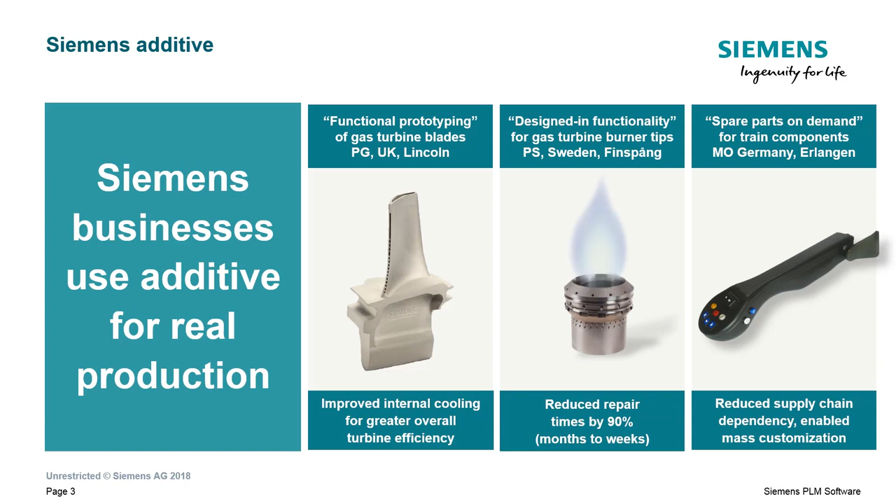So as I said, Siemens, we don't just write software. We actually make these parts, and then we try to take the knowledge from building 3D printed parts and put that back into the process when we design our software.

So as we think about the opportunity with additive manufacturing, we think about that taking several forms. We believe that companies who adopt additive manufacturing have this opportunity to reimagine their products, reinvent their manufacturing, and rethink how they do business.

So on the design side, what we're seeing is a need for companies to reimagine their products for this new additive manufacturing technology. And this means not just modifying an existing design so that it prints properly, but actually rethinking a part, redesigning it from the ground up to take advantage of the capabilities that additive manufacturing brings to the table. With anything less than a full redesign, you can get small gains, but you won't really get the full potential of additive manufacturing.

Then on the production side, we see companies evaluating their processes and looking for ways that additive manufacturing can help augment and streamline those manufacturing processes. So people eliminating moldings and castings and other long lead time types of manufacturing with additive manufacturing. We see them eliminating a bunch of assembly processes by taking complex assemblies and merging them into a single part or fewer parts using additive manufacturing. Things like that are helping people take their manufacturing processes and evolve them to include what additive manufacturing brings to the table.

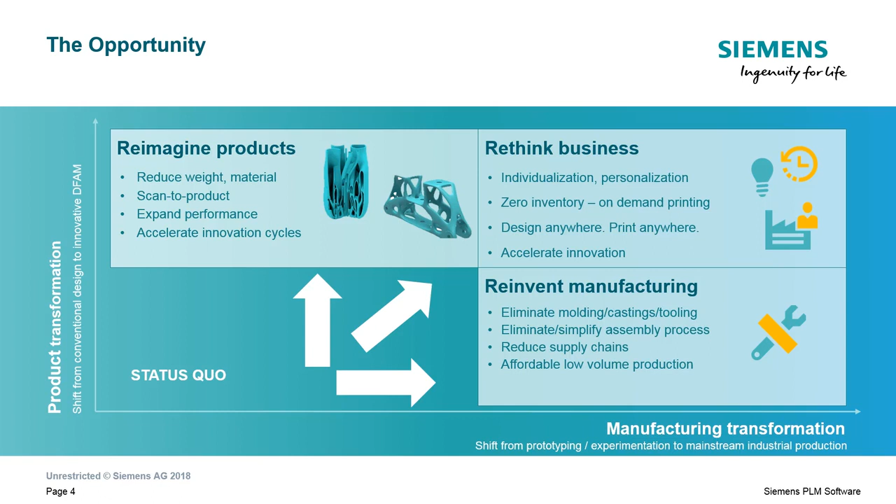Now, that being said, when we look at the additive manufacturing landscape and we talk to various different players in the industry, we also see lots of barriers to industrializing additive manufacturing. And the largest barrier is this disconnected process chain. We commonly talk to customers who have 4 or 5 and sometimes even as many as 8 different software products that they use to complete their additive manufacturing workflow.

Now, each new piece of software they use requires a data translation. It introduces the chance for errors and sometimes even reduces the quality of the data that's being passed between the different stages of these workflows. And furthermore, many industries like defense and medical require traceability of the data from the initial design all the way through to the manufacturing, so if something happens out in the field, they can trace that problem back to wherever it started in the process. But this becomes really difficult when you have such a disjointed process here.

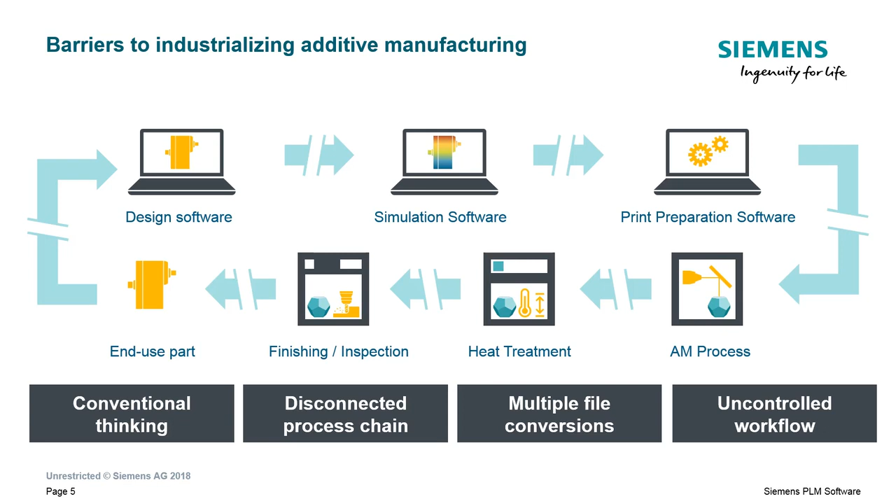So the result of this is that a lot of the companies we talk to feel like they're less efficient than they could be, that the process they have is more prone to error. So at Siemens, we're working towards fully industrialized additive manufacturing, and this means that the entire process chain must be integrated in order to allow for a smooth, lossless exchange of data between the various different processes in the workflow. So data from every step of the process must be handled and managed along with the data from the previous steps.

This tightly integrated process leads to a proper, uninterrupted digital thread from design to manufacturing, bringing about higher quality, more efficiency, and true traceability. We believe that for additive manufacturing to be a truly industrial process, you need a tightly controlled industrial workflow to go along with it.

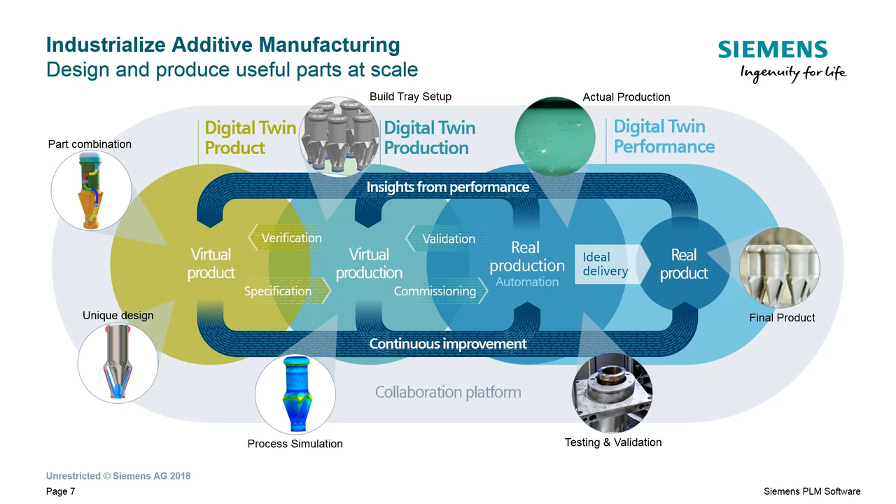We've begun working towards that end by building the necessary pieces of software into our NX suite of products. On the design side, we've introduced Convergent Modeling technology, which allows you to manipulate CAD data with native processes regardless of that data's origin. So facet bodies, scan data, and native CAD data can all interact seamlessly using the same tools you'd use with CAD data alone.

In this series of images, we have a part that came from one of our partners as STL data, so it's just a facet body. But we need to make some changes. We want to remodel this little cone-shaped diffuser at the end on the left, and include some fins to help direct airflow.

To do that, the first thing we have to do is remove the old cone. In a facet modeling system, this requires selecting a bunch of facets, possibly even individually depending on how close they are to other things, deleting them, and then healing the geometry. With NX, we don't need to go through those steps.

We simply create a cylinder using our normal CAD operations, and then subtract that geometry from the facet body, so it just chunks it out, and the system handles all of the intersections and healing of the facet body automatically. Then we design a new cone with the desired fins using normal CAD modeling techniques.

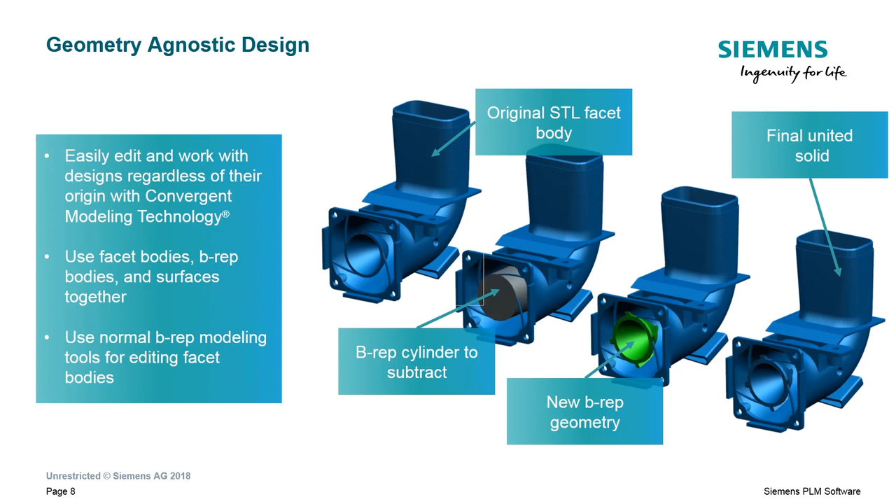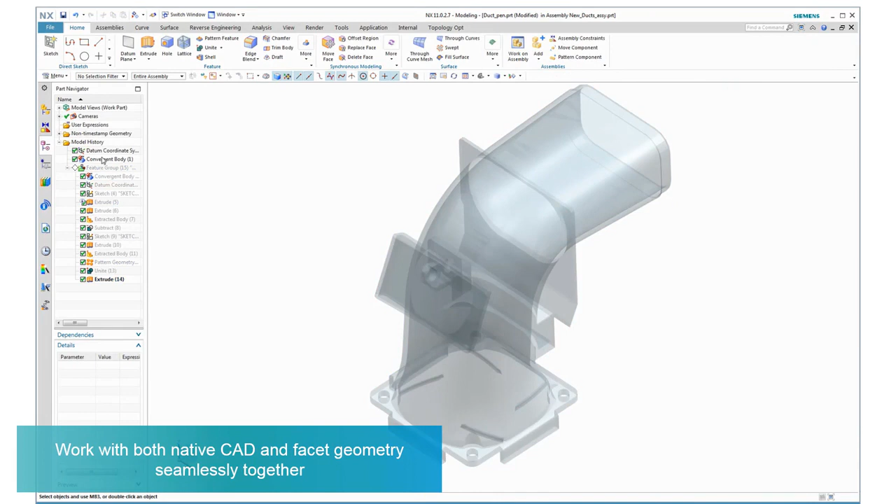This is a video, and just to warn you, these videos I have today are pretty short and sweet. The topics we'll talk about in these videos are things we'll deep dive into in later webinars. For today, we're touching on these things, giving you a teaser, and we'll deep dive on these in other webinars.

So this is seeing that process in action. We've taken that duct, we're going to create a cylinder and subtract it. There, we subtracted down at the bottom, the little cone. We're adding a new one in with vanes. We just hit unite, and boom, we have a final product where the original STL geometry and some new CAD geometry are all united together in the same part, and it's as quick as that.

There's really no mystery at all from a user standpoint. It just works. Taking this kind of geometry and using them together is something unique to Siemens NX, but again, very powerful for lots of these additive manufacturing applications that we see with things like facet bodies.

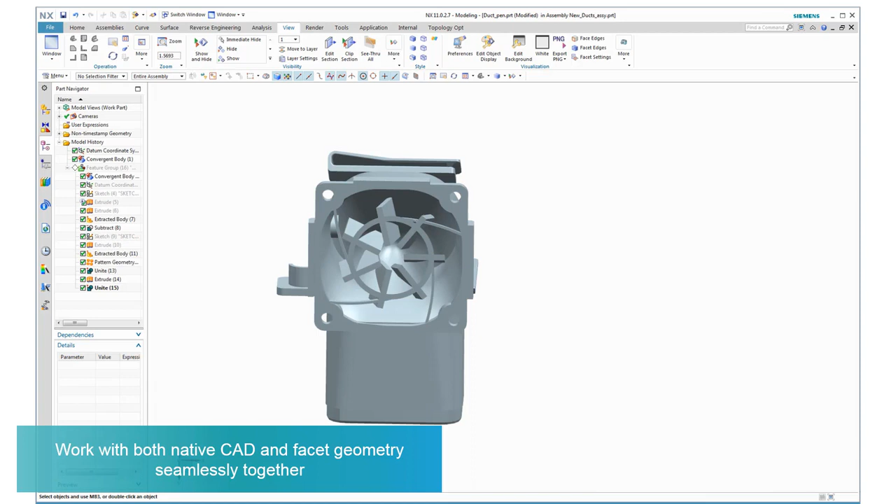Continuing the theme of providing a fully integrated tool set for additive manufacturing, we've also integrated topology optimization into our tool. So for people who wish to optimize their designs, you can do that without breaking the nice digital chain of data from beginning to end.

It's worth noting that as topology optimization becomes more mainstream, the number of companies needing to manufacture parts like these is going to increase. In many cases, the organically shaped parts that result from topology optimization and other generative design techniques are pretty much impossible to manufacture using traditional methods, or if you do, it's pretty difficult. To manufacture parts like these, you really need additive manufacturing.

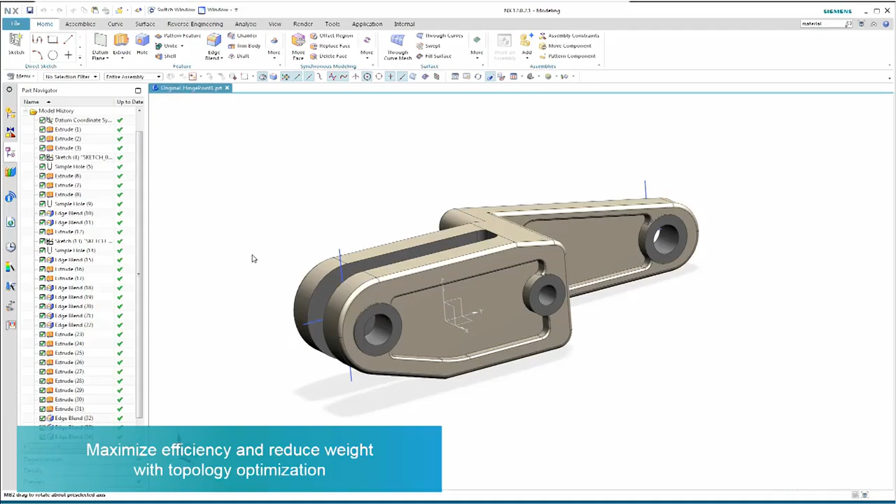So to look at what this looks like inside of NX, here we're inside NX again with the original part, sort of a bracket. And what we're going to do is create a work envelope around that bracket. The pink area defines the extents of the final part, the red area is keep out area, and the blue areas are pins. We're going to assign a material, steel, which I think we already have assigned in this case.

In the background, I've done some other things like set up a few loads, but in reality there's not a whole lot more than what you see here. We'll be deep diving into this in another webinar later, in a month or so. But you tell the system to run, and it's going to use those loads, the conditions you've given it, the bounding areas, the keep outs, the pins, those sorts of things. It's going to look at all of that and create an optimized part that's also been analyzed automatically for strength and deformation.

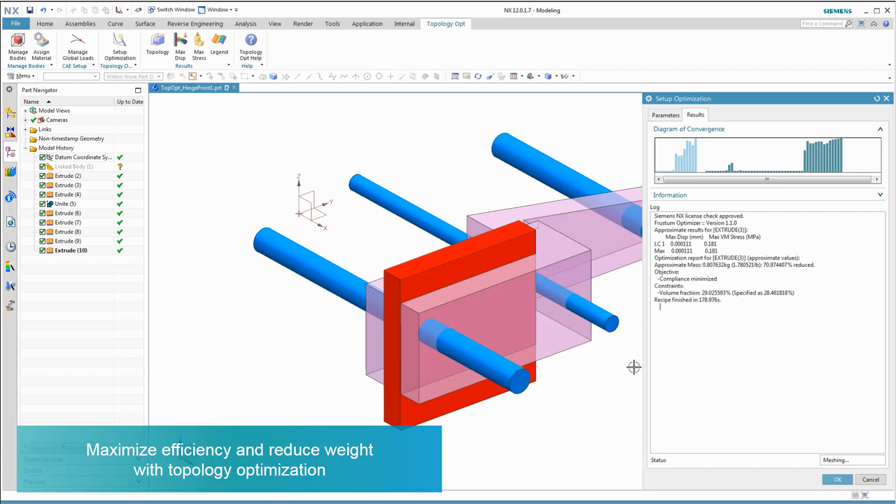So the system is going to run here, and again, this is all nicely integrated. The part that results from this can be put directly back into your assembly inside of NX. Again, no data translations, no back and forth with other software packages. It's all built in and results in these nice, smooth parts that can be used directly inside of an NX assembly.

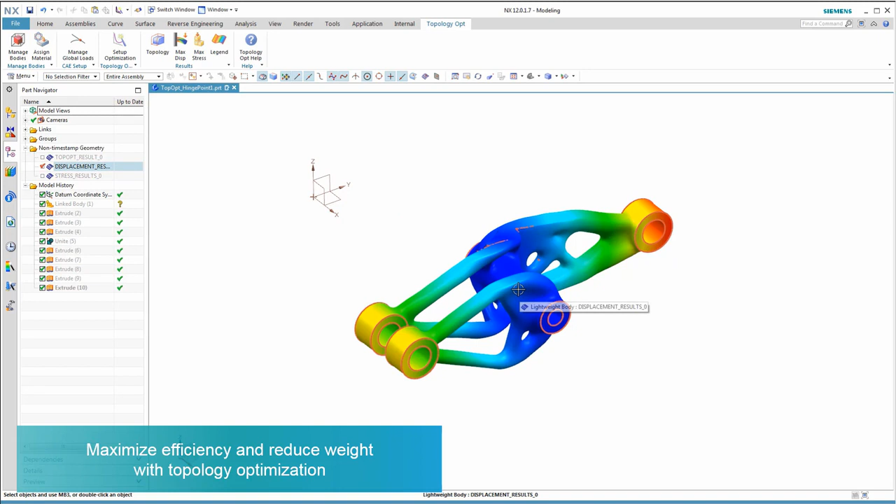Now, of course, Siemens also has a strong set of traditional analysis tools to ensure that the final design will meet your specifications. We have a long history of providing robust analysis tools for things like thermal analysis, flow, vibration, acoustic simulation. Between NX Simcenter, LMS, FEMAP, Star CCM Plus, and others, we definitely have whatever simulation and analysis tools you need to ensure that your product's performance in the field is what you expect it to be.

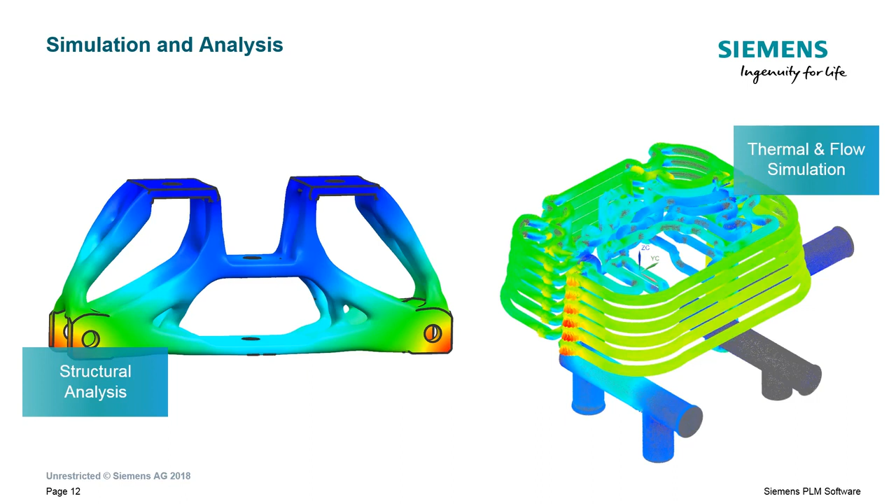So in this case, we've taken that same duct, we've done a fluid flow analysis. But like I said, there are other standard analyses available inside of NX. We've got all the standard ones you'd expect to be there.

Now, even if your company doesn't design parts, but instead provides the manufacturing operations for your customers, a lot of times simulation is still important because as the original customer designs are modified to fit the manufacturing process, you want to ensure that those edits don't affect the performance of the part in the field. So having these capabilities integrated into the system, whether you design parts or not, having those integrated into the system you already use saves you a lot of time and effort.

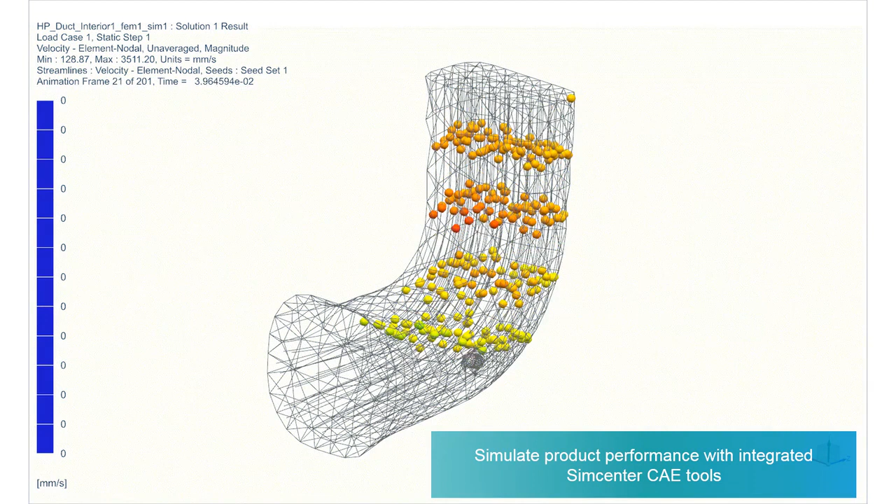And again, so we've got quite a few different simulation tools available inside of NX, and again, it's all a seamless process to analyze the data that you already have in the system.

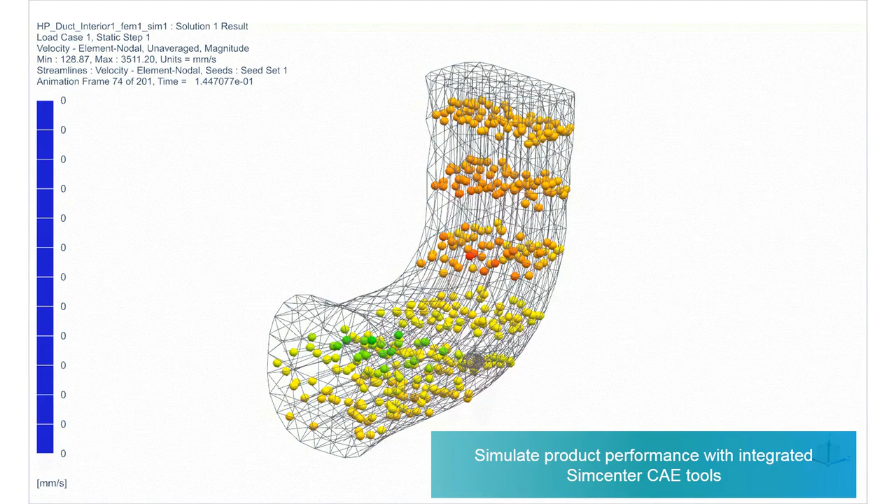Now, depending on the printing process, various steps must be taken to set up the proper build job before printing. So, for example, with HP's multi-jet fusion technology, functions like the 3D nesting you see on the left in the build tray become immensely important for executing that process efficiently. For other technologies like metal printing, the generation of support structures is necessary for proper output. And then depending on the printer type, you may also be able to set slicing, hatching, and path generation strategies inside of NX. So having all these functions built in means that you never lose that data fidelity or the traceability throughout the entire process, like we talked about before.

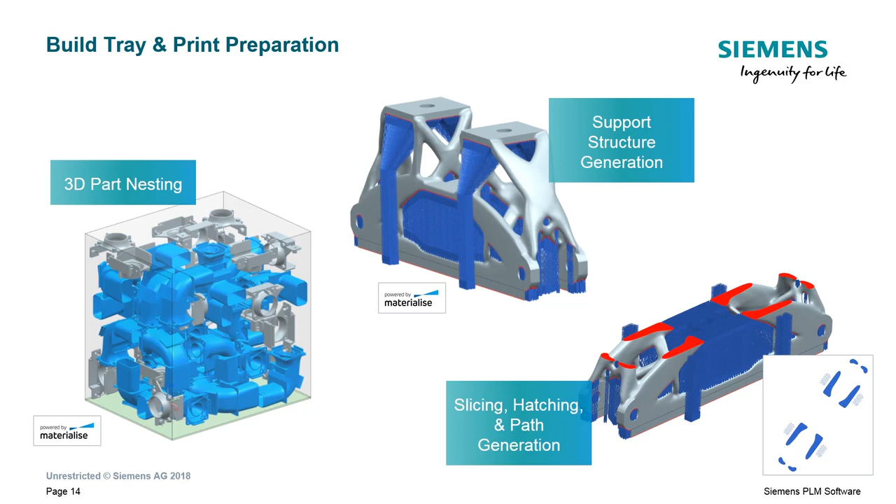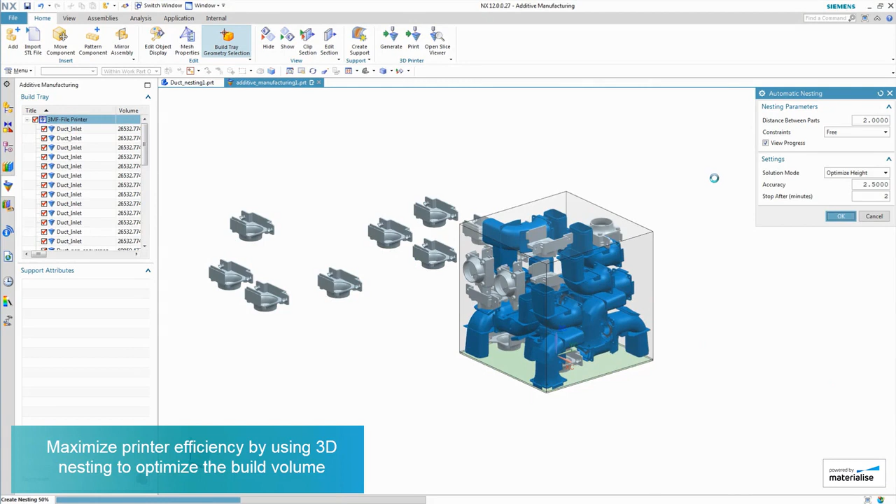So here's a video of our nesting capability. Again, in this case, we have the same duct part and another part that we're nesting here. And like I said, this is really useful for printers like, for example, the HP multi-jet fusion printers. To maximize the efficiency of that type of printer, you want to pack as many parts as possible into the build volume, and then push them down towards the build tray as far as possible. So our system does this by you give it limits on how close the parts can be.

You instruct the system to optimize according to minimum height, and as you can see, the process is fairly automatic. You give the system those inputs, you tell the system to go, how long you want it to process, and the result is a tightly packed build tray ready for printing.

Now, if you're using a metal powder bed machine, you might then apply some support structures, although for the HP this isn't necessary, so we didn't do it here. But again, this is all integrated tightly into NX, so there's no need for external tools to perform these operations like you might use today.

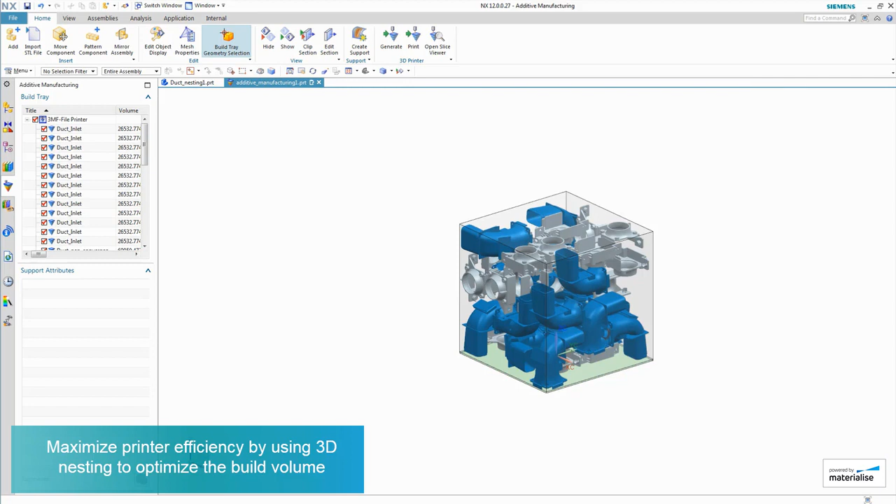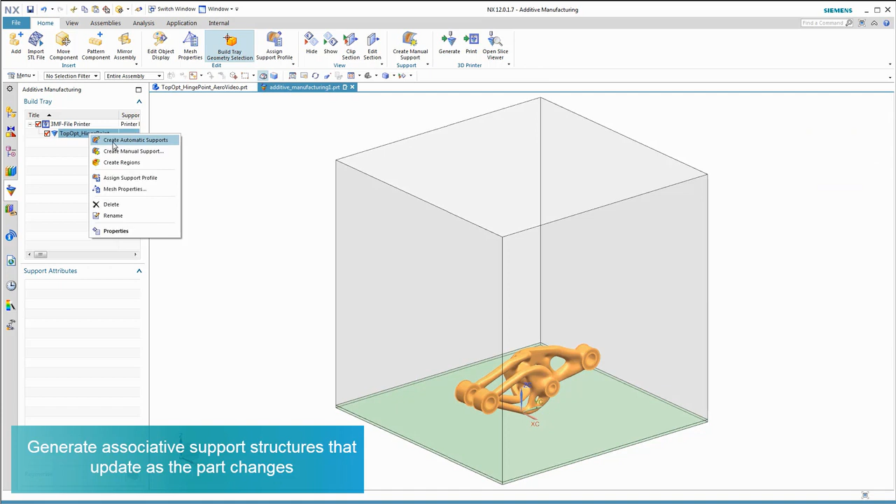Here we have a build tray. We're going to place the topology optimized part we created before onto the tray. Since this part is slated to be printed in metal, we're not going to 3D nest it, but rather just manually place it in the tray. We move it up slightly from the build surface so that when we remove it from the tray, we're not cutting into the actual part. And then we create some support geometry.

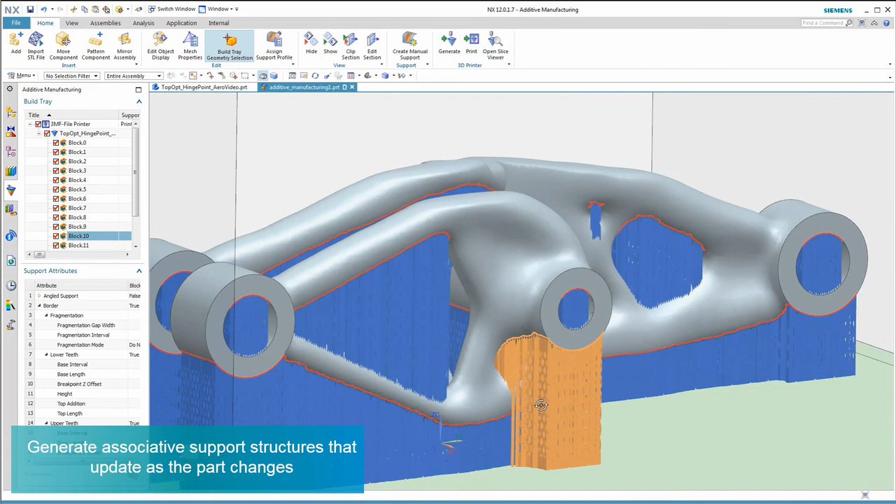This is all being done inside of Siemens NX, so there's no need to jump to an external system. The real advantage is that if the part geometry changes, you can automatically regenerate the support structures. This is the type of associativity you don't get with that broken process chain using five different products. You just update the part and let the associativity take care of updating downstream geometry like the support structures, saving a ton of time and reducing the chance for error. You don't have to rebuild things—it all just works seamlessly.

So finally, once you have your build tray set up, you need to print the final part. Again, this is an integrated process for Siemens NX. You simply select the printer you wish to use and set up your build tray like we saw before. Set some parameters—the material you're using, the cooling profile, other things like that. Finally, you just print, at which point we hand the process off to integrated build processors, which create the proper data and instructions to drive the various printers we support.

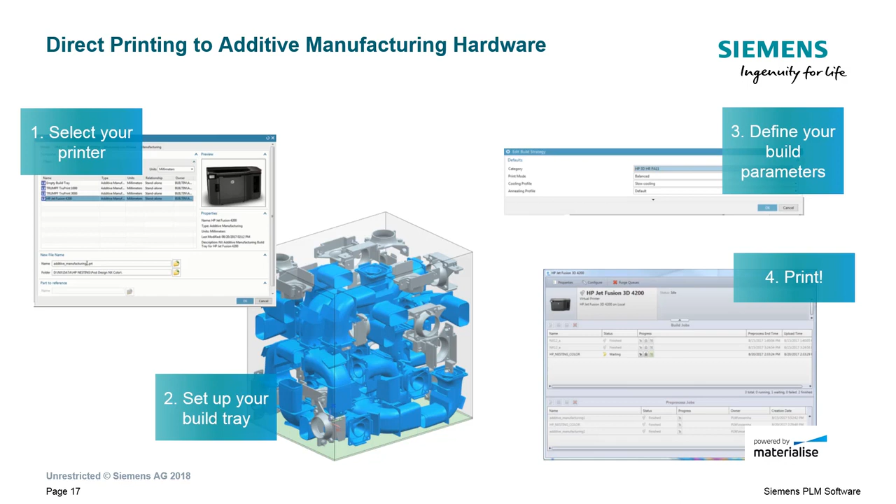Again, an integrated process that's completely handled within the Siemens NX system. You don't have to jump out to software provided by your printer manufacturer or anything like that. You have this complete workflow from the initial design through the analysis, through the optimization, to the build tray setup, and finally production. All that data is tightly managed, and the process can be completely industrialized.

Having seen the entire process from design to print, it's worth talking about the types of hardware we support. From standard planar powder bed fusion products that we see quite often in the market, down there in the lower left—and that includes plastic as well, because the HP multi-jet fusion can really be considered a planar powder bed—so we support those. We also support some very interesting new multi-axis technologies: hybrid directed energy deposition up on the upper left, and some fused deposition modeling we worked on with Stratasys on the right at the top. Those are both multi-axis types of printing, which we're starting to see a lot more people taking a look at.

We're partnering with various different people to make sure we have the capabilities we need to support the widest range of 3D printing hardware possible.

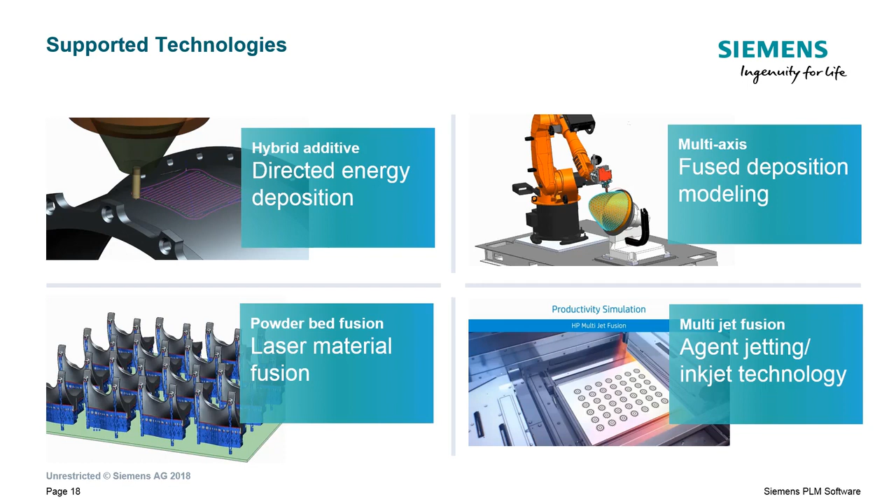Now, some companies would like you to think that once the part's been printed, this is the end of the story—you can just box it, ship it, and you're done. But in most cases, honestly, that's not true. Metal parts especially almost always require post-processing with machining or other operations to achieve the required finishes and tolerances. And parts of any kind should be validated to ensure the final produced part meets the initial requirements.

This is another case where having additive manufacturing functions integrated into a full CAD system pays off, because Siemens NX has all the functions necessary for post-processed machining and final part validation of your additive manufactured parts. This means you can program your additive and subtractive operations as well as perform your validation all within our system. That way there's less to learn, less chance for error, better quality, faster turnaround—all the benefits you'd come to expect from such a streamlined process.

To make all this happen, we've teamed up with what we consider to be the world's leaders in additive manufacturing equipment and technology. This is because we realize the importance of maximizing the value of our customers' investment in this AM equipment and their process. We understand that our customers will often require multiple different additive manufacturing technologies to make their production happen. This has driven us to partner with the best technology companies in the industry. These companies have years and sometimes decades of experience, and this is why we partner with them to bring our end-to-end solution to life.

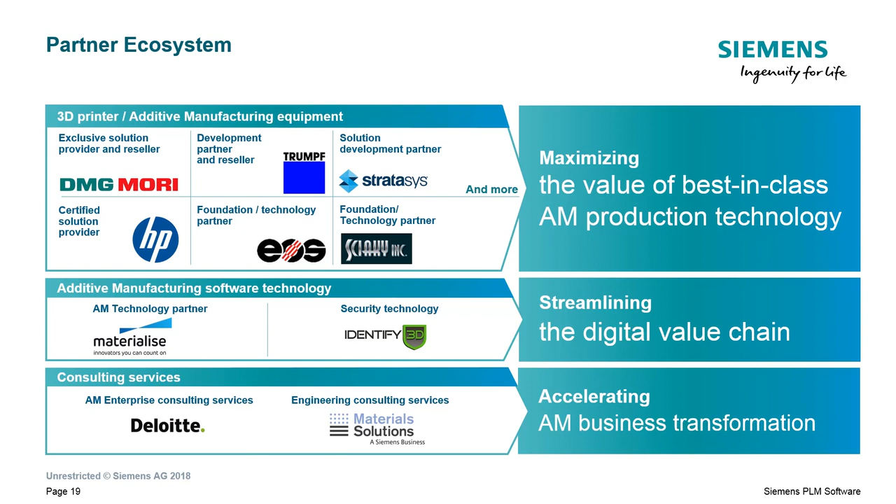So what we've seen here is that Siemens PLM software system provides the solution for true industrialization of additive manufacturing. You start with the design, ending with the final validation of the part. Our system includes all of those processes necessary to complete the additive manufacturing workflow, and you can see those steps here from beginning to end.

Now, this fully integrated system for additive manufacturing includes NX, SimCenter, Teamcenter - our standard package of CAD and data management tools, supporting the entire process: the CAD, the CAE, the additive manufacturing, the CAM, all in one place, and easily incorporating design changes with associativity between the different steps, the design stages, the production stages. All of this brings us to what we consider to be a truly industrial production system for additive manufacturing.

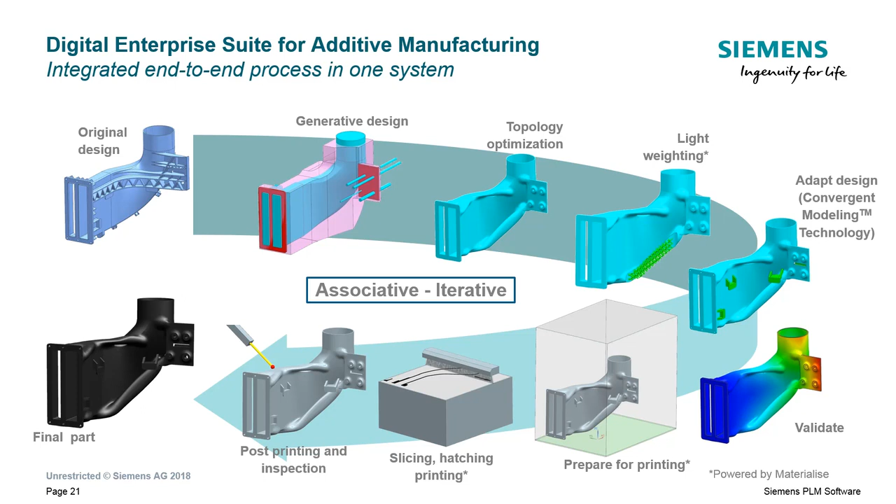Now, I mentioned before that Siemens doesn't just write software, that we actually print parts as part of our daily work. So how does all of this play out in the real world? At Siemens, our manufacturing businesses are designing for additive manufacturing, and we're 3D printing production parts that go into end products.

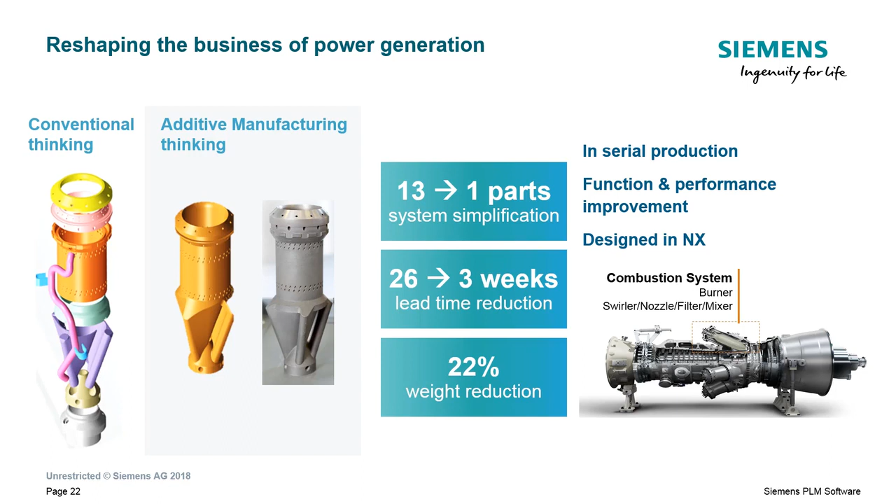This type of rethinking of the entire design is only really possible with additive manufacturing as the final production process. Again, using our NX tool, they were able to take this design from what used to be a fairly complex assembly they had to weld together into this one piece part, and have improved their design quite a bit in the process. So, very impressive stuff.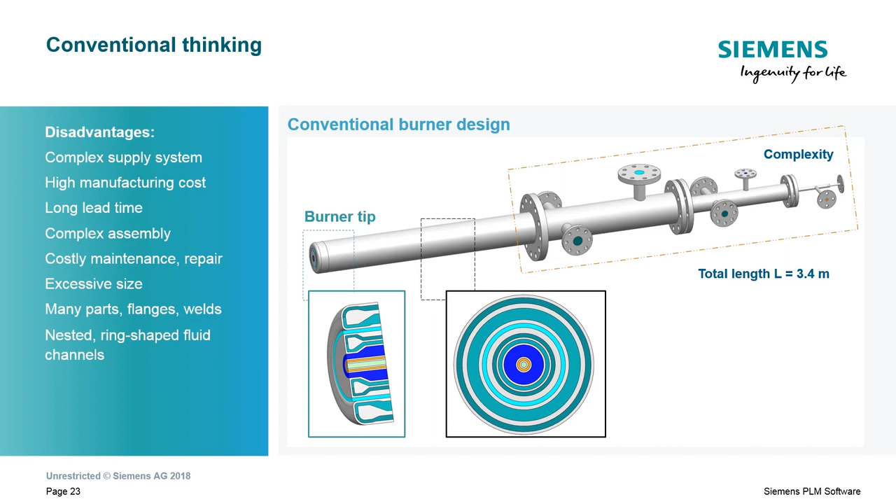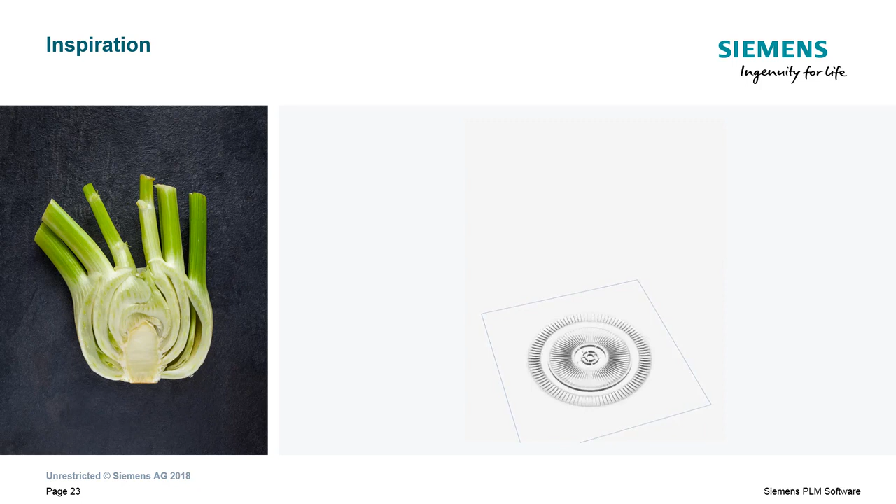So here's where the aha moment came. Somebody, I guess, was probably making dinner and started thinking about this, and they saw a fennel and thought, well, what if we could kind of take that internal area of the fennel, how it twists and rotates around itself, and use that as kind of the inspiration to redesign. Additive manufacturing empowers us to create these sorts of shapes that we never could have made using traditional manufacturing methods. And they used NX to create a parametric model of this new concept.

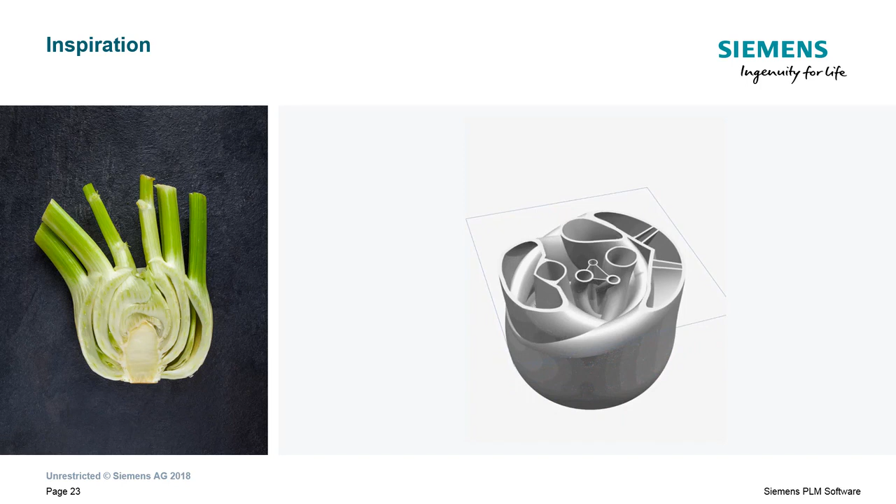And then they took it one step further. They very quickly achieved their optimal design by letting the computer do a lot of the work. They did this with the digital twin. They linked this parametric model in NX to our other products, Star CCM Plus for CFD analysis, and then HEEDS to explore the design space of possible solutions.

And those two together came up with a highly efficient design for the internal channels inside of this particular burner head. Now, Star CCM and HEEDS are two other Siemens products, but they allow you to optimize designs using methods other than topology optimization, again coming to a solution that's optimal for the requirements of the various different situations.

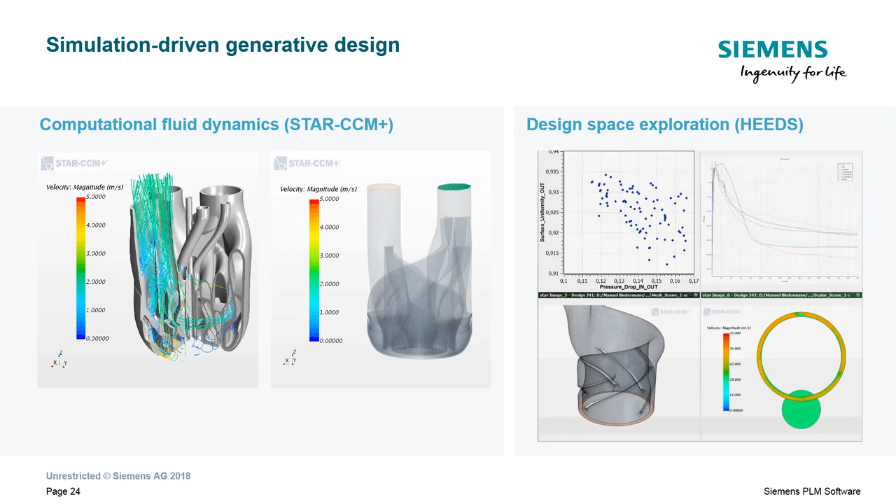And this is the final result. So you may have heard the phrase, with additive manufacturing, complexity is cheap, and this is one of those things that kind of proves that case. We have a new, more elegant design that compresses all of the complexity of that entire original system down into the small head of the burner that's now 3D printed.

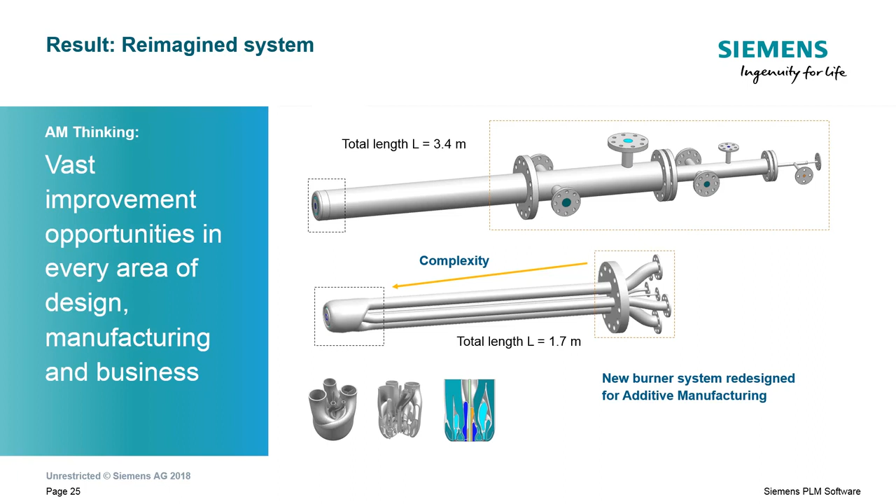And this was done with a significant reduction in manufacturing effort and cost. Over 50% reduction in the number of welds required to assemble the burner, less than half the number of parts present in the original design, half of the size of the original design. And in the process, the team also identified a number of improvement opportunities across design, manufacturing, and even business.

So as I stated, at Siemens, we don't just make software for additive manufacturing. We actually use our own software to make these awesome parts in our daily business. And we're creating these amazing 3D printed parts in an industrial fashion with our own tools.

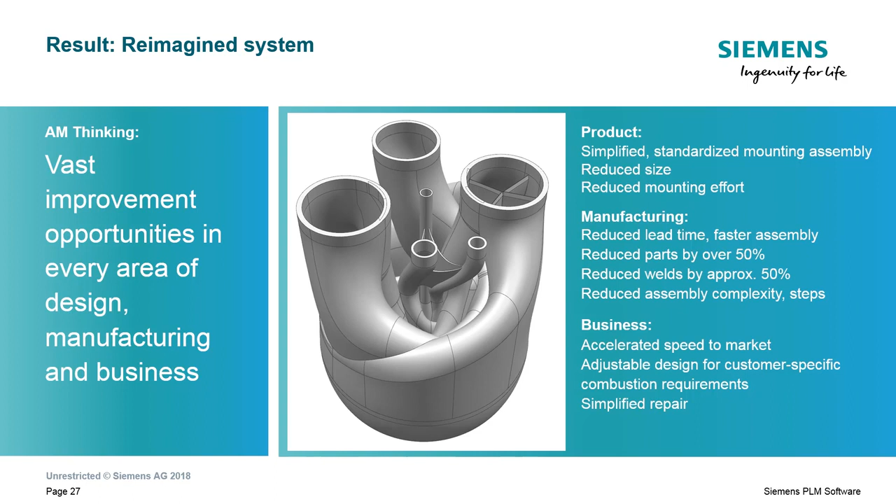So just to summarize where we're at Siemens, we're working hard to industrialize additive manufacturing. We really believe this technology allows our customers to reimagine the products they produce, to reinvent the way those products are manufactured, and even to rethink how they do business. So we want industrial additive manufacturing production to become an everyday occurrence. But to get there, it's going to take tightly integrated software processes to enable and drive that evolution from prototyping and one-off custom printing to true industrial scale production.

And that's why we've worked hard to ensure that our Siemens NX product is uniquely positioned to enable this sort of industrial additive manufacturing future with our end-to-end integrated additive manufacturing process.